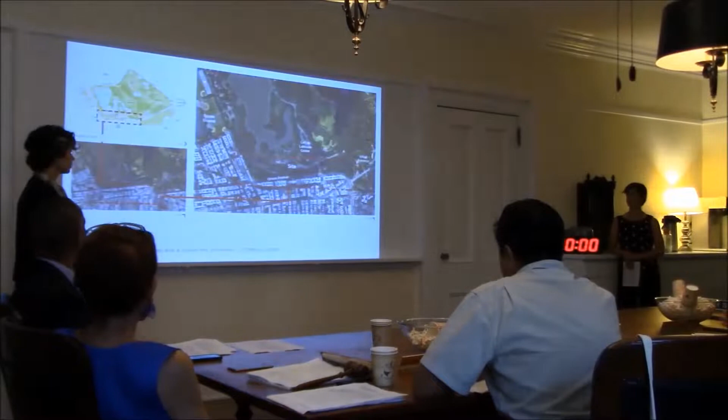So for where we're at, the southeast corner of Prospect Park, we're looking at Ocean Avenue from Flatbush down to Parkside and wrapping around on the sidewalk onto Parkside. The bike lane component is only on Ocean Avenue. There are future plans for bike facilities on Parkside, but they won't be part of this capital project.

And to speak a little bit about cycling in New York City, especially cycling in Brooklyn, I wanted to give you some of the background and numbers that we always look to when we're designing these kind of projects. Over the last few years, we've seen that the number of people choosing to bike to work has grown by 65%. These are people who aren't just going out for recreational rides, they're choosing to get to work by bicycle and run any other errands associated with that.

So our group, the bicycle unit at the DOT, is tasked with matching and meeting that kind of growth by installing bike facilities throughout the city. And we've done that in Brooklyn over the last few years, installing 65 lane miles. And that's shown on this map here.

It's at a small scale, but you can see the density of the bike lanes in northern Brooklyn, connecting to the central business districts, those East River crossings, to really build out the core. And it's something that's missing from southern Brooklyn, and that's been an ongoing focus for us because we've identified community boards where there have been a lot of cyclist injuries and fatalities and a lack of cycling infrastructure there for them. And so the geographical link between the existing network and where we're trying to go to provide more bike facilities for people is Prospect Park.

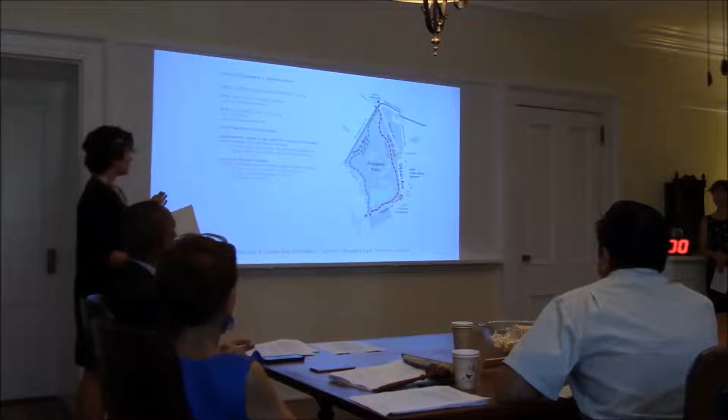Some more context about the street network around the park. There's been multi-year efforts to remove vehicles from the park to increase safety once you're inside. The last closure was in 2018, and to account for the increased vehicle traffic outside the park once Park Drive East was closed, there were signal timing improvements and new roadway designs to accommodate those vehicles using the street network instead of the park.

While we've measured that travel times have not significantly increased, it's important to note that Ocean Avenue is one of the alternate routes, so that's where the traffic that used to use the park is currently going. It has only so much capacity and so much flexibility to go back and change the road and markings there today.

Existing conditions on Ocean Avenue: right now there are 2 vehicle lanes in each direction during peak hours. Parking is allowed at the curb during non-peak. There's about 860 vehicles heading north in the AM and about 780 heading back in the PM peak.

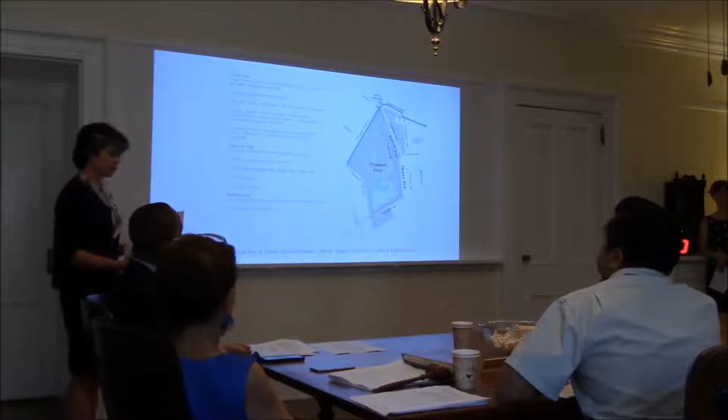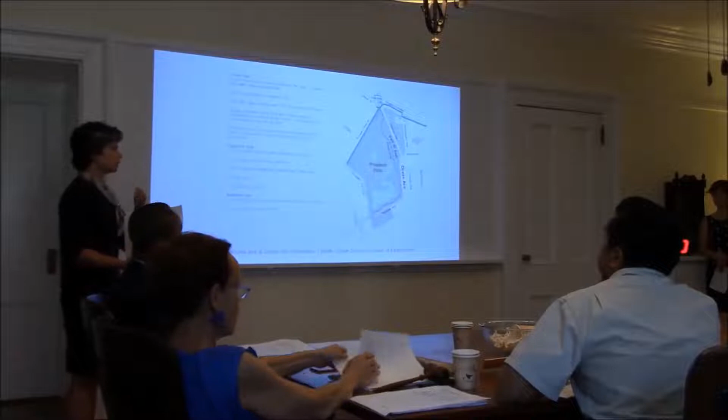I've already talked about the edge condition, an ideal place to provide protected bike lanes that don't intersect with a lot of vehicle crossings. That kind of bike lane is the most comfortable and appealing for anybody who wants to try riding a bike for the first time, or who isn't used to cycling in city streets.

Other north-south corridors south of Empire Boulevard that could possibly be considered for extending this network to the south might be Flatbush Avenue. It's a lot busier, a lot wider, and has a truck lane. There's about 40% more average daily traffic there than on Ocean Avenue, and there are intersections to contend with, so you don't have that nice edge condition where you can build out a protected bike lane.

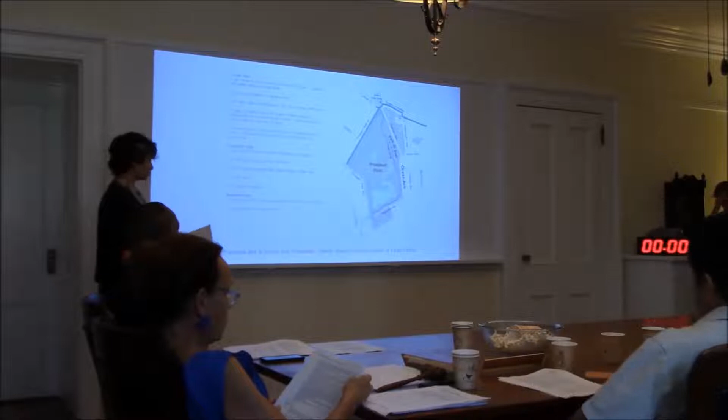Bedford Avenue is even further from the park. It's not directly connected to Grand Army Plaza and does not provide access to the park.

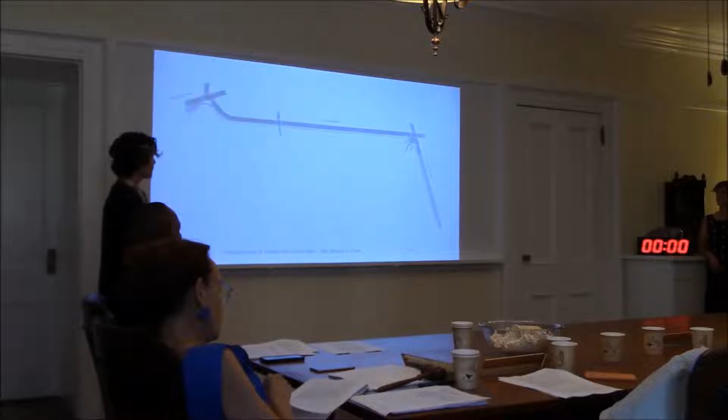I'm going to hand it over to Justine to talk a little bit more about the existing conditions on Ocean Avenue. I'll go through these pretty quickly.

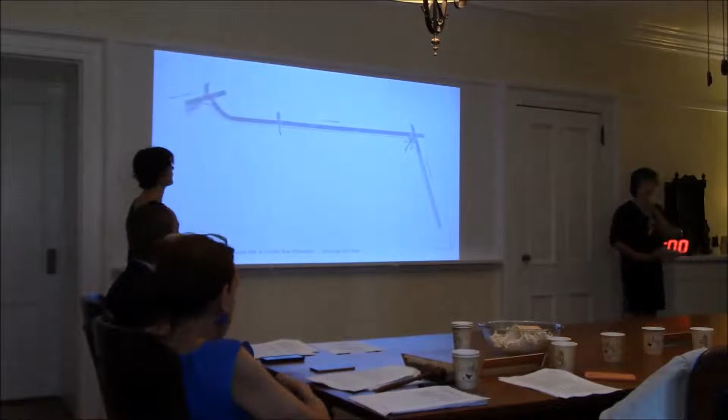The existing condition, as Acacia described, is a very long, continuous sidewalk: a 10-foot wide grass and cobble verge, a 10-foot wide sidewalk, and then another 10-foot wide grass and cobble verge. That's the typical design all the way around the park, and that is the original Olmsted and Vaux vision of the park, a continuous promenade with an alley of trees on either side.

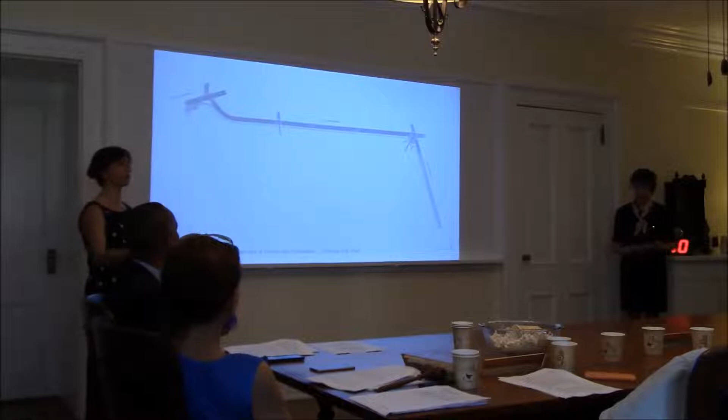On Parkside Avenue, we don't really have lighting, and again the pavement hasn't been restored or redone in many, many years. We don't have furnishings everywhere, so on Parkside Avenue it's just a straight-up restoration project.

Acacia is going to talk about the bike lane design and the various options that we looked at about how to accommodate this.

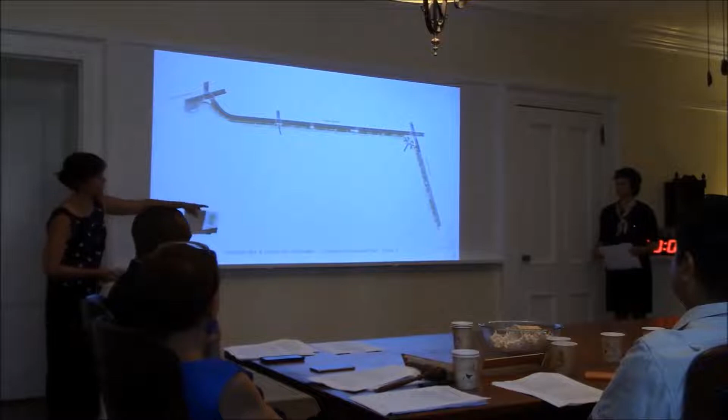So this is the schematic proposed plan based on that last study that you saw. This is very tiny, it's hard to see, but I just wanted to point out the darker green circles will be the newly planted trees. You can see it's quite a lot of them, and the entire outer edge will be new trees. Then on Parkside, it's more spotty because we're filling in with existing trees that aren't being removed or taken out unless for condition reasons.

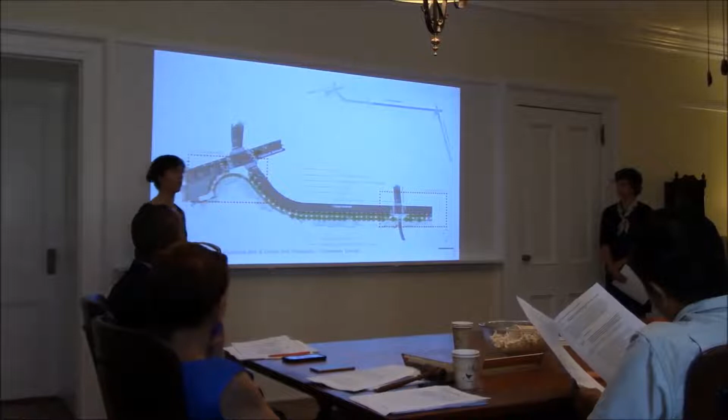So we'll use this to talk about the typical design. You have the existing green 10-foot wide verge, a 10-foot wide sidewalk with the exposed aggregate concrete, which is what we use on all of our perimeter. The outer verge will be 7 to 8 feet wide, varying a little bit based on the road geometry. And then the 8-foot wide bike lane with a 2 to 3 foot wide buffer between the bike lane and the traffic.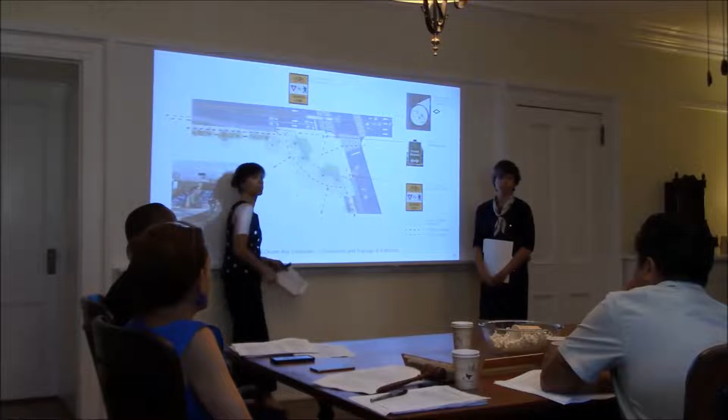The bike lane will just have markings, but it will grade back down to an asphalt path as it enters the park. On the arc, this will be an asphalt patch here and here. It's kind of a breadcrumb to tell cyclists exactly where they should go through the corner.

Here, it drops to show that the priority is to pedestrians coming through. They're not instructed to dismount, but there's signage that tells them they should be yielding to pedestrians here. There's also markings, not visible at this scale, that are yield signs to cyclists. As they come through here, they should be looking for pedestrians crossing in front of them.

I think you should study a little more in terms of anticipating more people coming to this new structure in the future, and also it feels a little bit like an accident waiting to happen in terms of bike and pedestrian traffic.

Is there any way to monitor the speed level, maybe with buffers on the floor coming up to this corner on either side or from any entrance, so that when bikes get to this point they're forced to slow down? Not just with a light, but something like rumble strips and signage, a physical announcement to slow down.

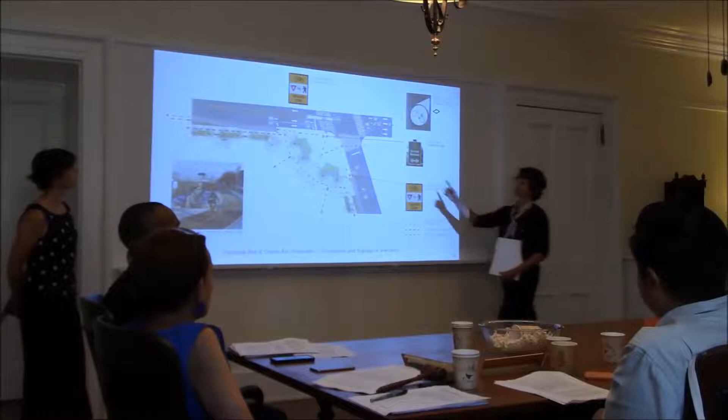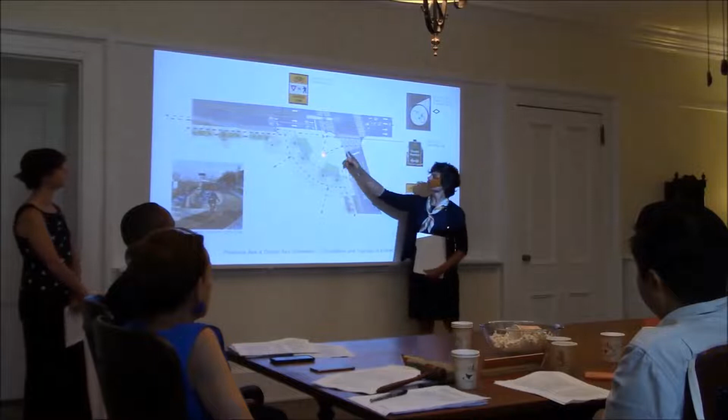The idea is indicating that cyclists should go here—should it curve this way and come down that way instead of coming straight into it? We looked at what it would be like to send the cyclist across here, but with pedestrians crossing here, if we could avoid that and have them enter at the corner, that was less of a conflict.

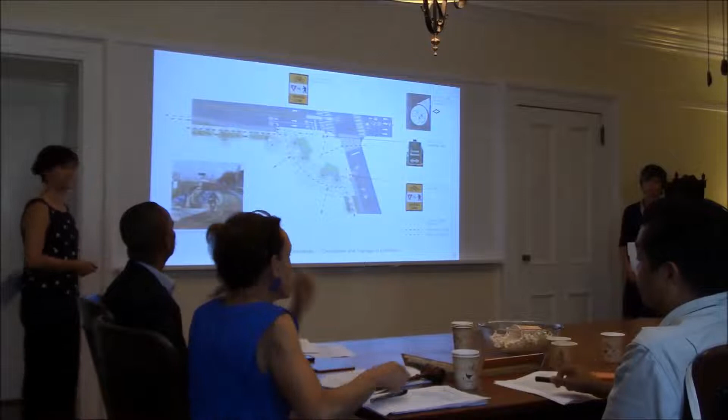Please go on. So we did include a couple of the artist renderings of this corner. They're very schematic, and they've already gotten a lot of feedback that they are working on to develop their design. But we thought it was a good view just to see how that bike lane circles around behind it. Here's the vehicular corner, and here's a view if you were coming up from Ocean Avenue approaching the corner—you'd see that bike lane there.

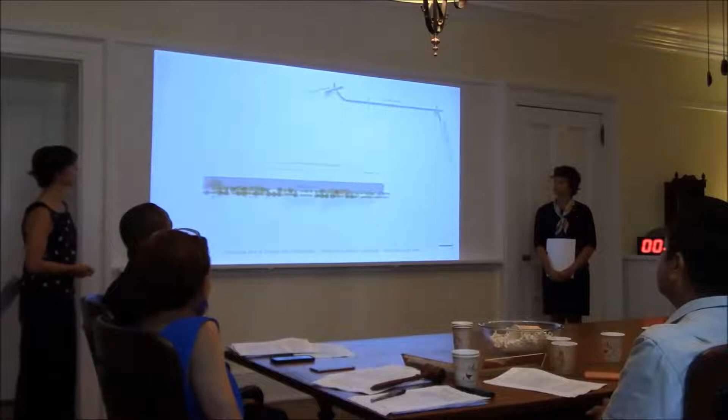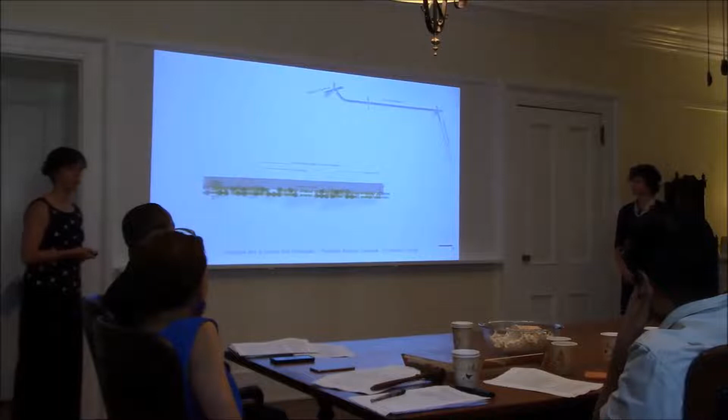So then as you turn around the corner and go on Parkside, as I mentioned, this is really just a restoration project. At this point, the bike lane is on the street for a later project. So what we'll be doing here is replacing trees, taking out the concrete cobble, repaving the sidewalk, adding new street furniture and lighting. The geometry stays the same: 10 feet, 10 feet, 10 feet. You can see right now old pavement, missing furniture, no lights, and we're proposing to put those in with the same materials we use everywhere on our park perimeter.

So, tree removals. I can click through this quickly: the red X's represent trees removed for design, the blue pluses represent trees that can be transplanted, and the gray X's are trees determined to need removal for condition. This project is a couple years out, so we may lose a tree or two before we even get there. I think there was an accident where one was already hit at our north end. But as we said, unfortunately, this project does require removal of the trees on the exterior edge.

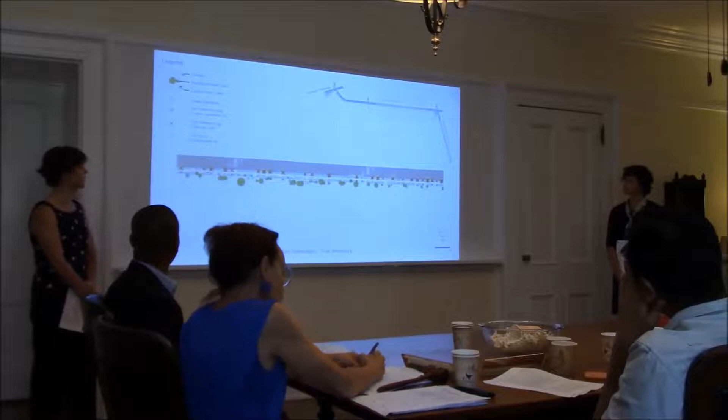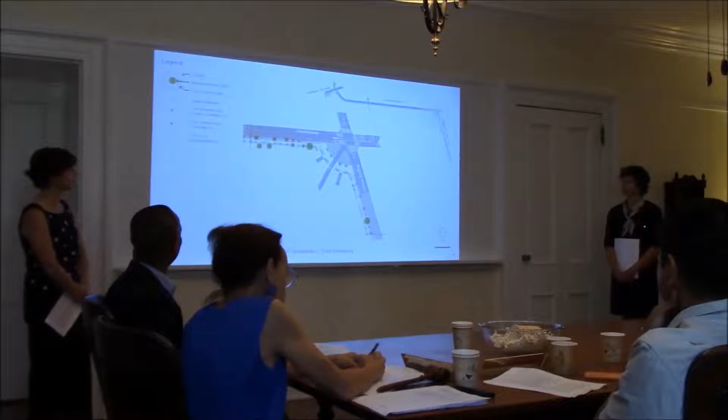We're happy that we can plant an entire row of new trees along the way. Approaching the corner, the open X is a stump removal—there are a couple of stumps along the way as well. Then you see some X's within the park interior; those are also condition removals where the tree overhangs the sidewalks. We'll be removing trees that are in danger or dead already.

This is our existing tree palette. They are all different ages, having been planted many times over the years. The original tree palette on the exterior side of the park were elms along Parkside Avenue, both sides of the sidewalk, and maples around the rest of the perimeter. Neither of those are ideal today.

We like to plant a variety of trees now and try not to have a monoculture. Also, elms and maples are both hosts for Dutch elm disease and Asian longhorn beetle, so we want a mix that's a bit more varied. We're proposing to add 3 types of oaks, seedless sweet gum, and American linden.

This palette could be nuanced further. We're working with our forestry and street tree team to do that, but we picked these trees because in form they will create that continuous, elegant allée along the way. They have a similar growth habit to each other, so we can have a mix that still looks harmonious in the way that Olmsted and Vaux envisioned.

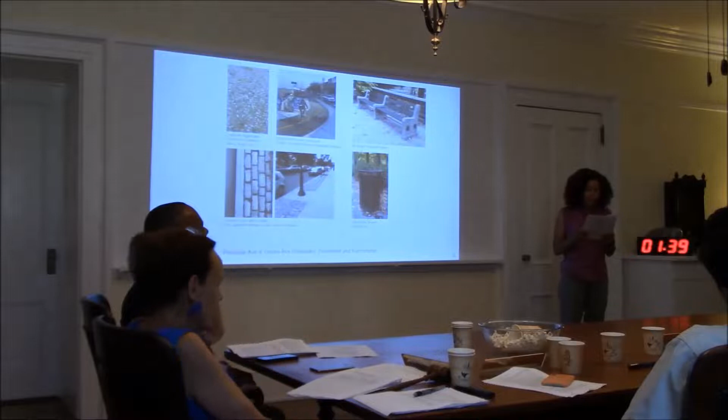While the project will by necessity remove a number of mature trees, a fair portion of those trees are diseased or otherwise in poor condition. A number of the existing trees will be replanted inside the park, and the new replacement trees will be more than double the number being removed. These new trees will, in not too many years, establish a fuller, more robust tree canopy along the entire project area.

The bottom line of Streets PAC, however, is that the new design will improve safety for residents and visitors, will encourage and facilitate non-motorized mobility, and will improve aesthetics along Ocean Avenue. The proposed project has the support of the Prospect Park Alliance, the New York City Department of Parks and Recreation, the New York City Department of Transportation, and the Landmarks Preservation Commission. We strongly urge the Public Design Commission to join these other entities in supporting the proposed perimeter reconstruction of Prospect Park along Ocean Avenue. Thank you.

And the last speaker is Dulcie Canton. Thank you, you didn't butcher my name.

Hello everyone. My name is Dulcie Canton and I'm the Brooklyn Organizer for Transportation Alternatives. I'm also a member of a group that nobody wants to be a member of: Families for Safe Streets, a support group for victims and survivors of traffic violence. I also live in Bed-Stuy, and I'm here in support of the bike lane on Ocean Avenue because it will provide safer access to the park for residents that live east of it.

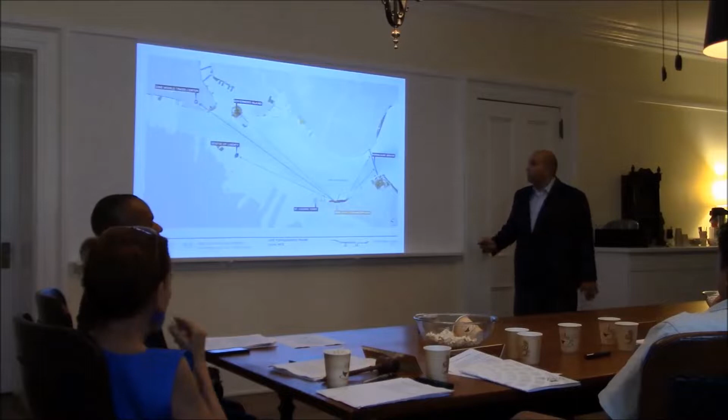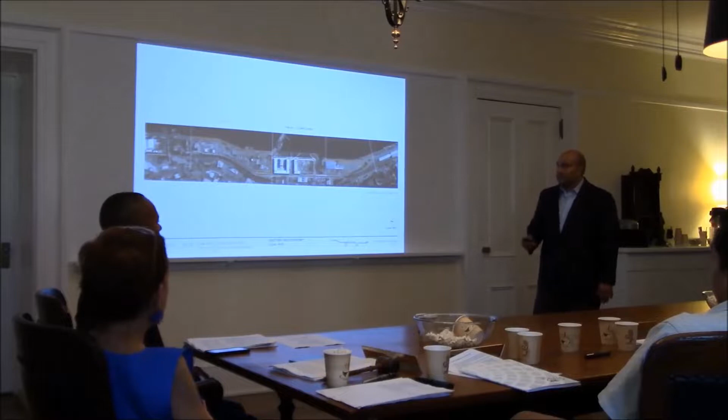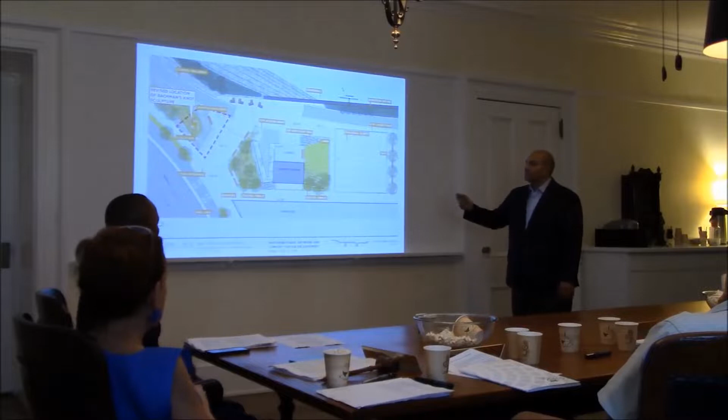This is the neighborhood as we see it. Phase 1 is the middle of the project and has been completed for several years now, and our focus is looking at the bookends of the south and north project. The art is located in the northern phase, as a very focal point - one of the main entrances and gateways to the Esplanade, where the active programming of sports courts is right adjacent. We have a comfort station right adjacent to that, and we transition to almost a very slender linear park along the Esplanade to the north.

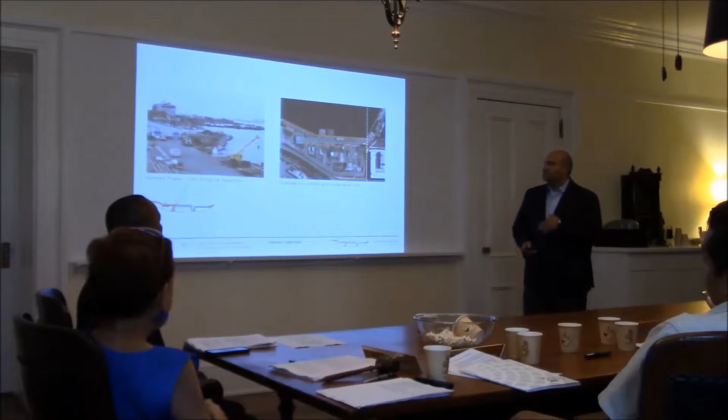This is the existing conditions of what it looks like right now.

Just to give a quick overview, it was a public process that we did for selecting the artists. DCA and EDC put together a jury that included themselves as well as our design team and a few local constituents. Susan Randolph, fine arts consultant, put together 11 shortlisted architects and artists, and we had a public process where 4 presenters presented to the public, who voted, and then at the end of the day the jury selected D.B. Lampman, who's the local architect.

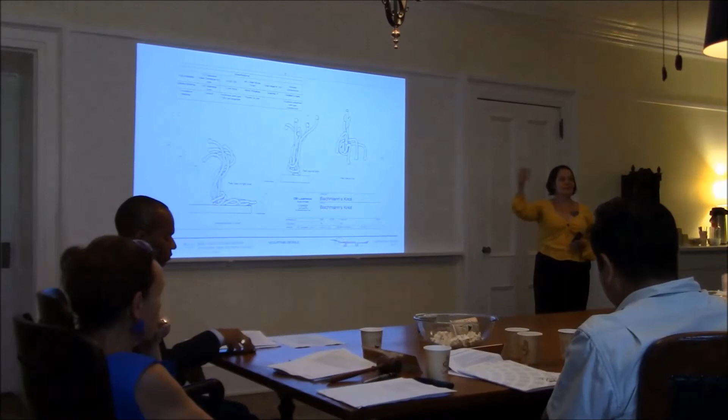I'm not sure what - some of this was just the limitations in terms of the materials we were told were allowable. They didn't want paint, didn't want a coating, so it had to be a certain way. And then some of the design also got tightened up a little bit to adjust for the fact that people couldn't climb it. Part of what I was going for in this too is also addressing some of the natural elements, like the plants and things like seagrass, that was also what I was thinking of in terms of reference.

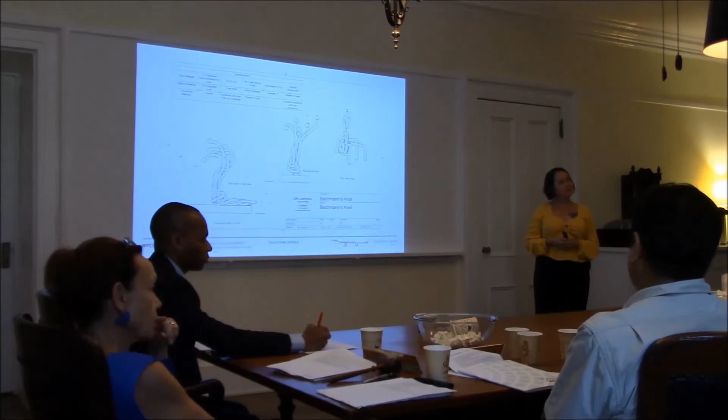I read that the tips were sort of supposed to be shinier than the rest of it. I don't know, I'm not understanding how that relates to the actual piece - can you explain that? It was just a different element. I wanted those top points to kind of reference a constellation pattern, so at night it would be a different visual - just more reflective, those would shine at night, sort of out at sea.

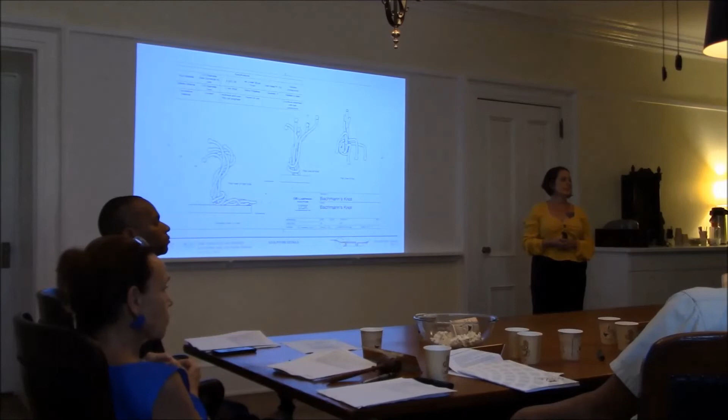I personally like the combination of organic and industrial in concept. I feel like you should try to reconsider the massing, or the way the knot comes around - maybe there should be one giant knot, or maybe all of the things should be spiral. I don't want to design for you because it's your work, but I think perhaps your concept should be a little bit more in line with what we're seeing, because right now it feels a little arbitrary, like you're forcing it to map the parameters of whatever everyone else is telling you. They should be helping you and allowing some space, so that your vision could be put into this project. I'm not sure - anyone else?

I would say that when I see it just as a read, the serialization might make it feel different. I get the organic quality and each one is legible, but I do kind of get a sense of snakes too, like Hydra. So it does feel a little bit aggressive. That may change based on the serialization, but it resonates with me to see what you say - in and of itself, I like what it is, but there is a bit of a read for me.

Well, I think that's 10 minutes. This-

I just want to say, I thought your concept behind the project is really beautiful, very moving, and my read was not so much the Hydra, but it looks like the knots unraveling. Because you just spoke now so eloquently about the community coming together, I honestly have not looked at what this knot is, but it just seems to me that it's kind of unraveling, and that's the part that concerns me, because it's such a beautiful part of your thought process. I don't know whether it was more raveled, but it was deemed climbable or something, so there were height issues and stuff.